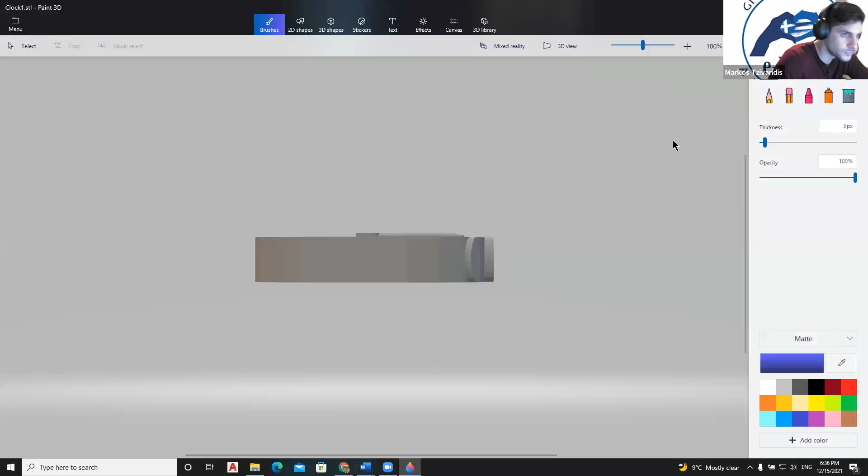All right. So let's go to the first clock. Let's see it all together.

I will not tell the names because we haven't asked anyone if they want to share their name, so we will just say it together. This is the first clock. As you can see, somebody tried to make, let's say, a clock for the hand.

Also, instead of putting a random square here, he also wrote something down. So he used a text, and you will see what the text can do. You can actually write things down, design what type of font you want, and if you make it a hole, you can make something like that.

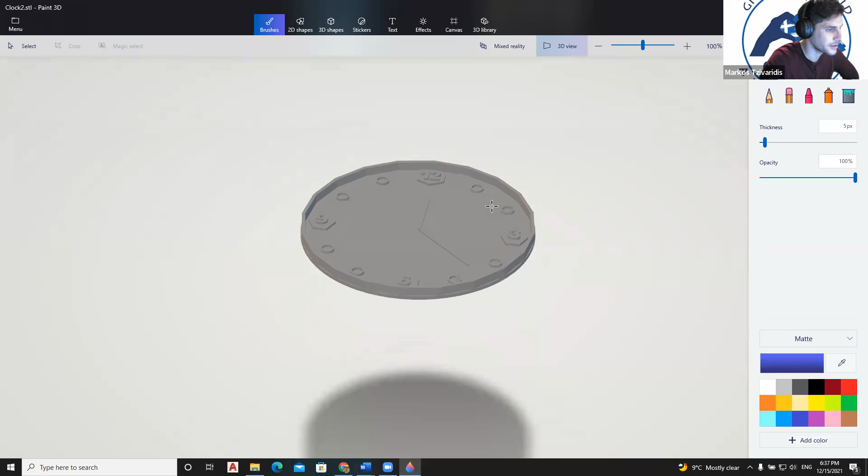This is clock number 2. I wanted to show it to you because basically this was the most beautiful one. I would actually 3D print it and put it on my wall. As you can see, it's very close to what I did.

The circles here, the 4 numbers, they are actually placed on top of an object, and yeah, basically that's the best design, the design, let's say, I would choose to go with.

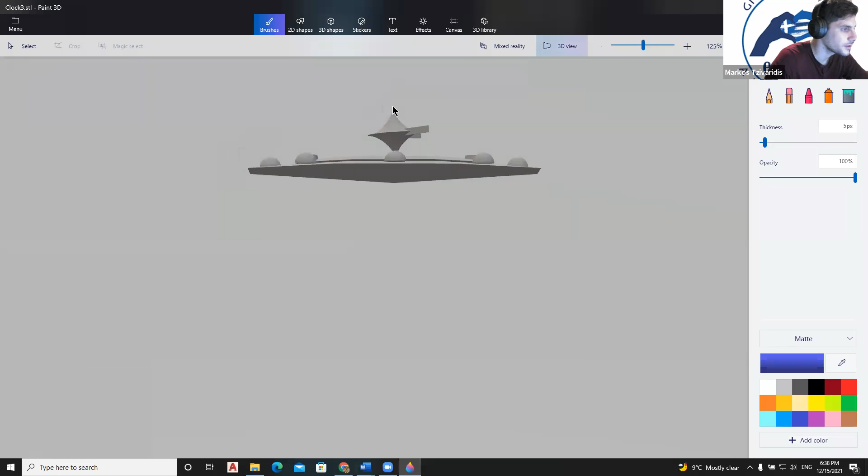And the last one is this one. So what I wanted to show here is that, as you see, the person who did it didn't make a circle. He actually made another type, let's say, of shape.

You can actually do that either by rotating, as you remember, with the stairs. You can do this part here, let's say, or this part, a triangle, and then just go on and rotate it, rotate it, rotate it, and duplicate it.

By duplicating, you can make this very interesting design, or you can actually use another shape.

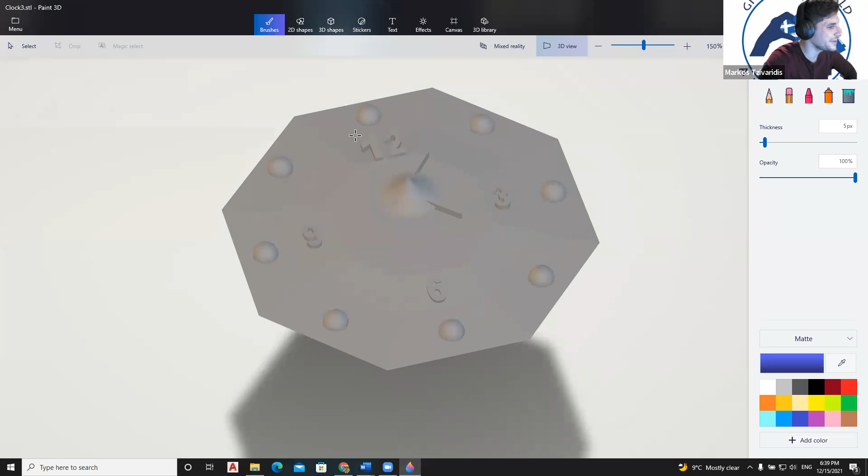Now, I think that this type of shape, the big one, may actually be a shape on Tinkercad, so maybe the person who designed it just took it from Tinkercad and placed it there. But either way, you can either do it like that or the way I told you to.

And yes, so basically, I don't want to take any more time to talk about the clocks. I want to congratulate everybody that spent their time making something like that. I saw a lot of things, some fun stuff, and some very interesting designs like those I showed you.

And now let's go to the main course. Let's all log in to our Tinkercad account and start creating a new design.

The first thing I'm going to show you today, as I told you before, is how to slice an object in two. And why would I want to do that? First of all, let me place the object first so you can understand what I'm going to talk about.

Come on. That's weird.

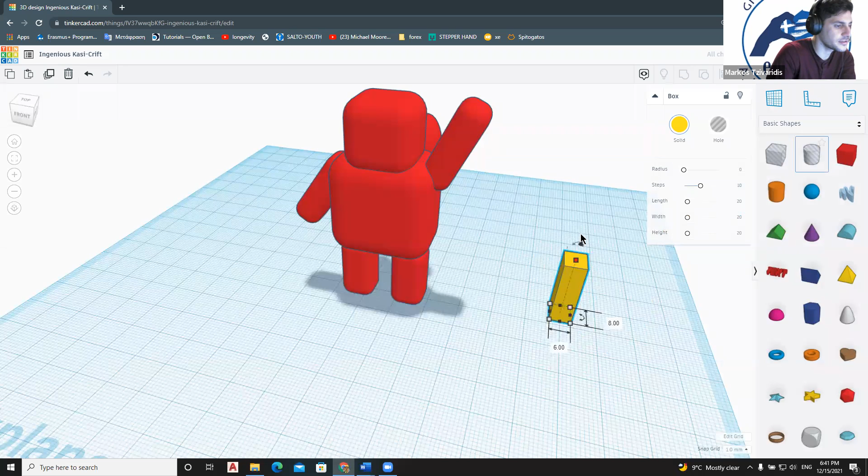This is the Astrobot, the Astrobot 2, or that's how they call it. So in order to print the Astrobot, if you want to print it, the slicing program will tell you that you can't actually print, let's say, this hand here, because it needs a support like that. I need to design a support like that to print it, because if I start printing here, it may fall.

So let's say that I want to avoid that. What could I do? I can either place it somewhere like that, hold on a minute, somewhere like that, so it prints from the beginning from here. Or I can cut it - cut this part here, just a hand, print it, and then glue it back together.

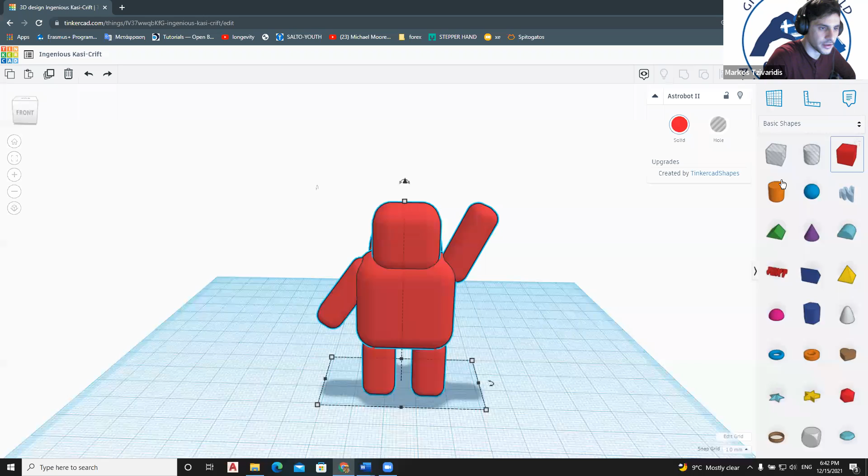So let's forget about this hand because it wasn't a very good example. Let's think about the legs, for example. So if I start printing the legs, I need a support here. I also need a support somewhere here. And of course, as I said before, a support somewhere here. Okay, like that. And let me keep that here for reference.

So in order to make the print faster, because supports also need time to be printed, I can actually cut the Astrobot in half. How do I do it? I drag a box and place it on the feet, let's say, of the Astrobot, like that.

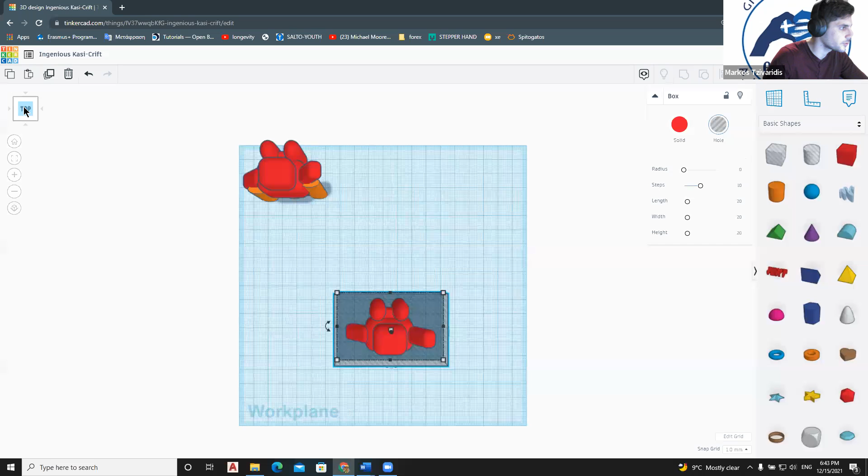I want my box to fit the whole Astrobot. As you can see, I click on the top here, on the upper left, and I fit the whole astrobot like that. You can actually click on the orthographic view to be sure that the astrobot is inside.

What I want to say here is that I always prefer the orthographic view from the perspective view because it helps me understand exactly where the objects are. But you can also choose perspective view, it doesn't really matter.

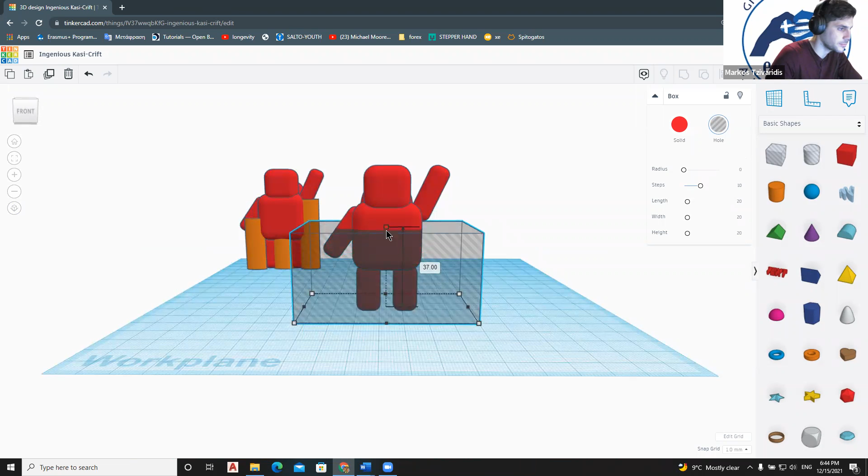So what I want to do here is cut it in half, and I am the one who decides how to cut it in half. What I want to do is cut it somewhere here, and now what I will do is duplicate the whole box.

So click duplicate while you have the whole box. See, this is here right now, but you also have to check the height, which is 37 millimeters. So right now what I want to do is just move my box up, 37 millimeters, like that.

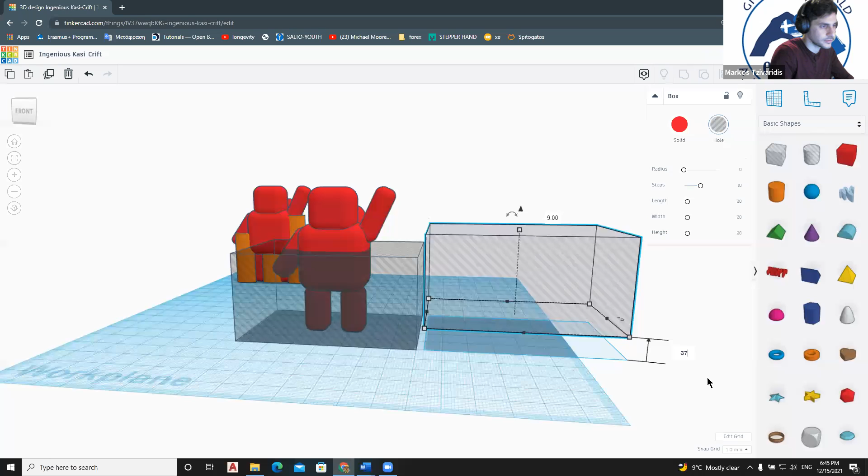And again, I will place my box back to my astrobot, like that. So now, if I duplicate the astrobot - instead of clicking, then shift clicking, then shift clicking, you can actually just drag your mouse and duplicate all of them together. And now you have two astrobots.

And maybe you have imagined how I'm going to do this. I'm going to delete one box from the first astrobot and one box from the second astrobot. And if I group the first astrobot with the first box and the second astrobot with the second box, I have my astrobot cut in half.

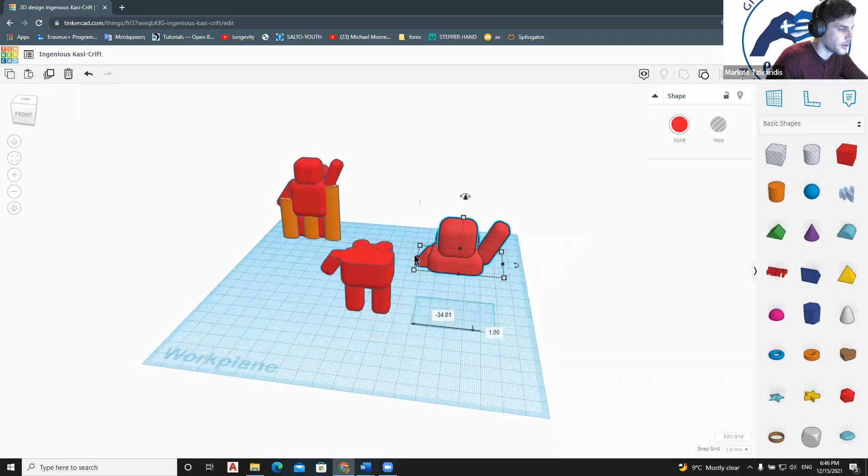And now, if I want to print it, I can rotate it. As you can see now, let me show you - right now, this part can be printed without any support, and the only support that I need is this one right here. So instead of printing that much of a support, now I can print my part with a small support, or maybe no support, and glue it together.

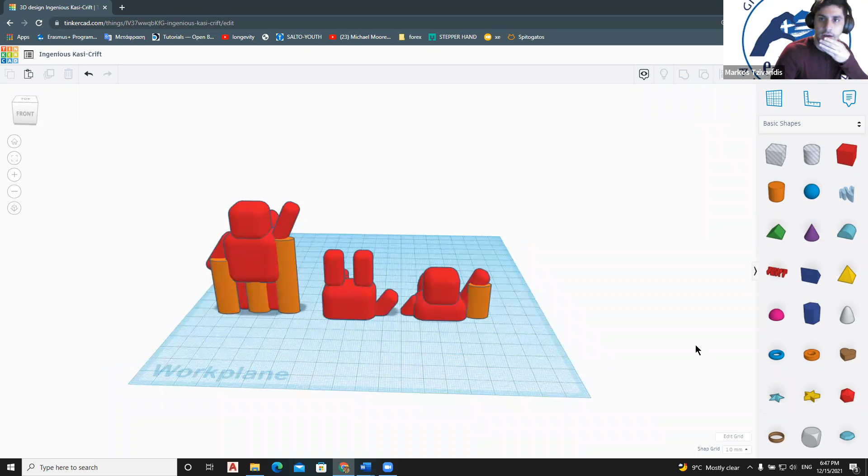So this was the first thing that I wanted to show you. If you have any questions, guys, you can ask now because we're going to move on to our second part. Maybe also write it in the chat, whatever you want.

Markos? Yes. Okay, I think it would be good to explain to all participants about the support because, you know, many of them are not very familiar with the 3D printing process. So maybe they have some questions about what support is for 3D printing.

Okay, I will explain it to you again, guys. As I remember, Thanos, Julie mentioned the supports. No, Julie, didn't you mention the supports? I'm not sure, I try to think about it, okay, but I'm not sure. Okay, I'll speak a little bit about it right now.

So basically, what happens? Let me, okay, let me go back to the presentation. 1 minute, guys.

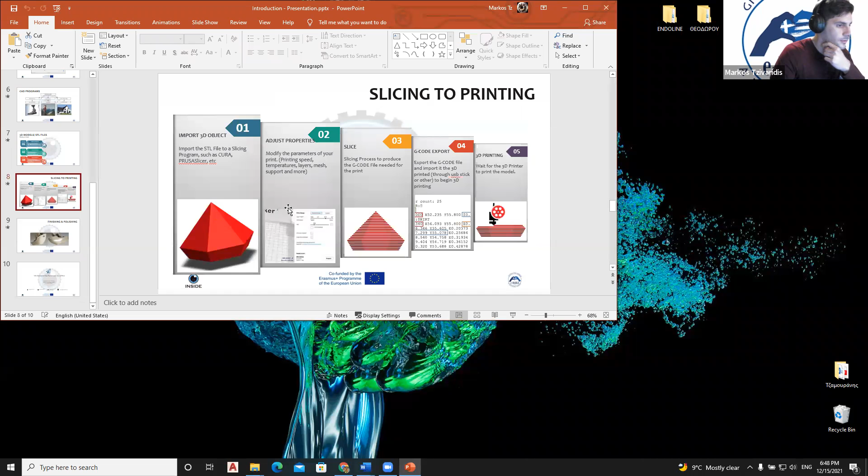Let me see what I have. Okay, maybe this. Forget it, let me just show you some pictures.

This is a very informative picture. So when my printer prints, it starts printing from the first layer, then the second one, and we are talking about FDM printers, not the other type. FDM are the cheapest and the easiest to find and use. So I print layer by layer by layer. When I reach this limit, after this point, I can still print, but it's not that safe now because I start printing on air.

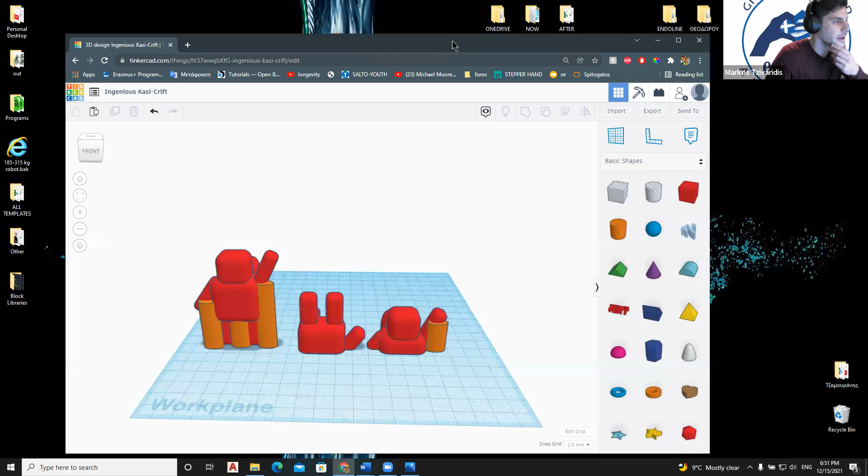Yes, and that's all, I hope I covered that matter. I thought Julie talked about it. I'm really sorry. Okay. Markos, don't worry, there's no problem. I really don't remember, I'm sorry.

In any case, if anybody has any question, okay, so Pia just asked. Hold on a minute, so Julie just answered, okay, let's move on.

So the next thing I will go through is how to import and export your files and send them to people, just to inform you how you will do that. We will go fast through that.

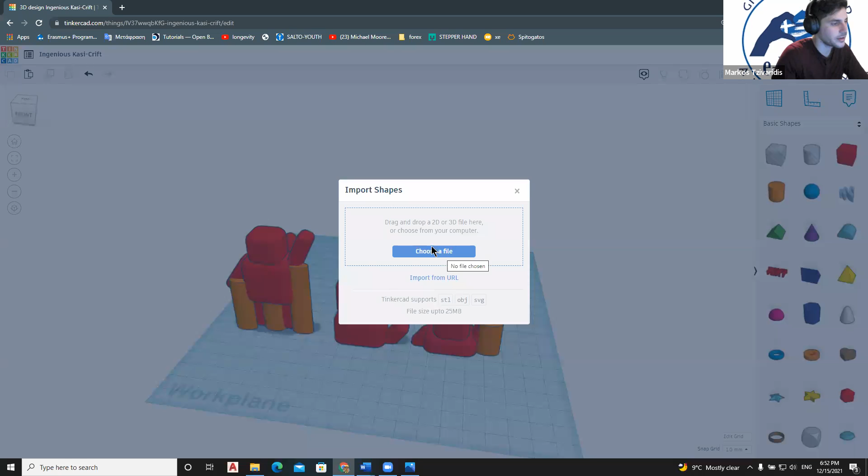First we will talk about importing files. So when I have a file and I want to import it, there are some ways to do it. I can either import it as an STL or an OBJ file, which is basically a 3D model file, like the one you see in front of you right now. You can export that file from any type of design program, well not any type, but most of them.

This is basically very self-explanatory. What I want to do now, and I want you all to do, because if you design to print things, that's what you'll do 50% of your time, is go to Google, write down Thingiverse, which is the most common site for finding designs to print, not the only one. Since it's Christmas, let's go to the reindeer.

And now you can go here, download all files, click on this, wait for 5 seconds. Okay, that's weird.

Let me... Markos, yes, that is not weird, this really happens to Thingiverse the last days. Maybe try not to download them all, go to the download... okay, things, and you will find it just a little bit further. Yes, okay, thank you, Julie, thank you very much. Maybe I'll download through here. Okay, yes.

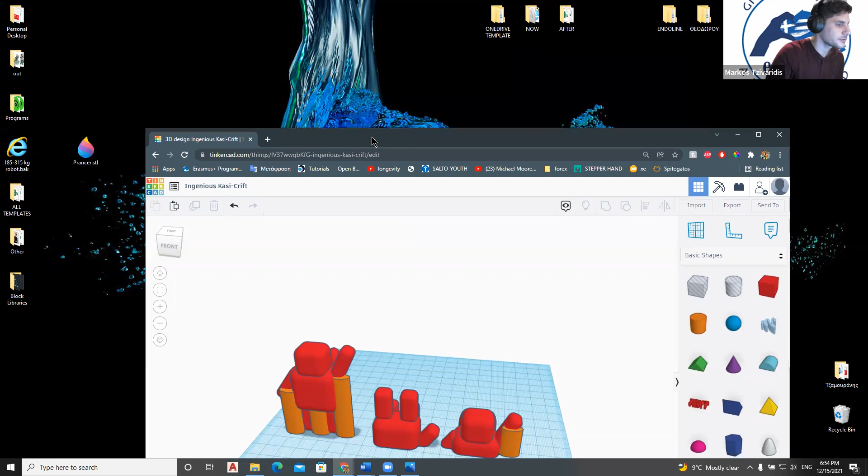So I have this one here, I hope this is the design. So this is an STL file, my prancer.stl. I can click import, choose a file, the one that I chose on Thingiverse.

Let me also show you that you can go to the search part and search whatever you want. Let's say I want to find an elephant. Thingiverse will try to find some elephant files, like this one here, or like there you go, or like this one, the pink one. So whatever you want to design...

Maybe I want to design a box, I don't know, I want to print a box or design it. You can find so many things here, and also besides Thingiverse there are more 3D printing sites where you can find free 3D models and either redesign them or print them.

Like MyMiniFactory, for example, .com. In any case, let me go back.

So as I told you guys, you click import, choose a file, and find your STL file, and just click open.

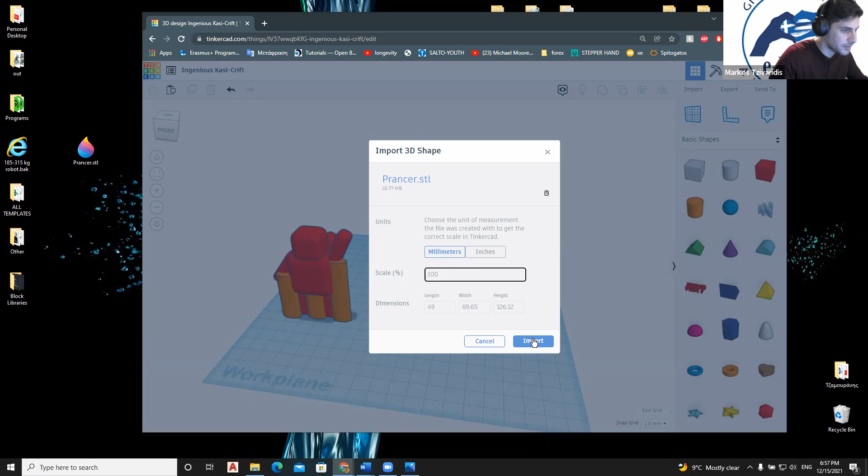Let's group all those together and put them on the back.

Markos, if I may. Yes, yes, yes. Vangelis Terianakis has a problem seeing where to download the files from Thingiverse. Could you show him again? Thank you. Of course, of course.

Since we are also waiting for the file to import, here you can click on any picture. Let's say I want to find an apple. I write apple, and now it finds Apple products. In any case, let's say I want this Apple iPhone stand.

So I click on the picture, and it redirects me to the site, and I can click right here. Click download all files, and it will download every file that James Declercq designed.

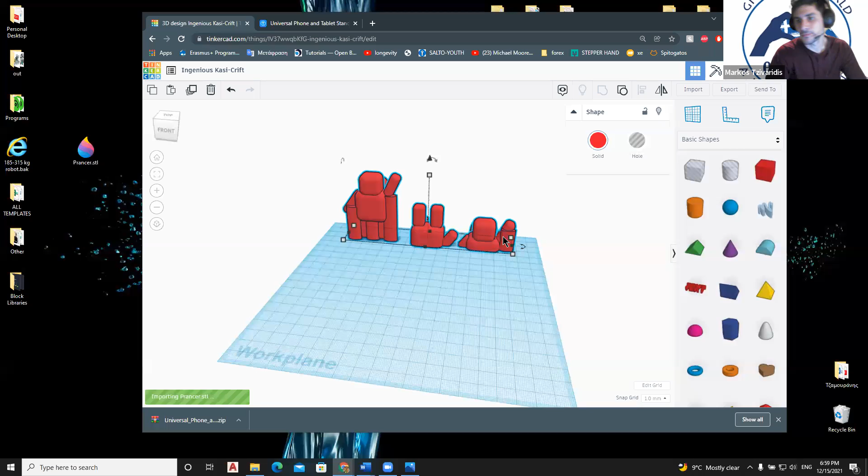So, yes, I'm trying to download it, but you did something else before. You pressed download all files, and the 404 error came up, and then you did something else. What did you do? To download the file. Yes.

So let me show you. Here on the stand, you can click here that says Thing Files. I will click now, and now you can see each file separately and download them separately. So if this error comes up to you, maybe you can try downloading them separately.

So Vangelis, please try to do it. And if you have any problem, let's talk about it at the end of the lesson, maybe, so we can continue.

So, wow, still importing the file. That's weird. So any other, all clear now? Okay, perfect. Okay. That's weird.

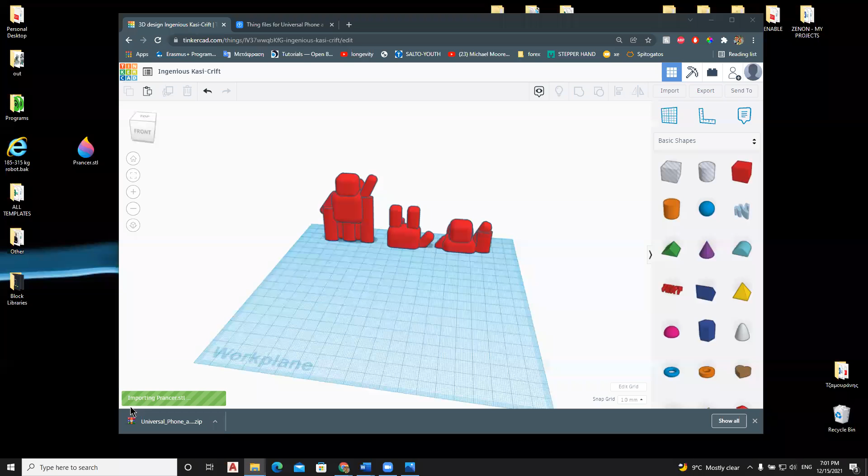Let's wait for a minute, guys, because let me actually talk about that. So if your object is not that simple, let's say it's not just a box, it's more complex, it has more shapes on it, generally more complexity on the design, it may take a lot of time to import it, because right now what Tinkercad is trying to do is trying to translate it, let's say, and import it to the program. And the more complex your file is, the more time it will take.

In any case, I will try to find a simpler file just to showcase. Let me actually import one of the clocks. So it's not gonna be that Christmassy. Ah, no, it will be. Okay, so the file just got imported. As you can see, it got imported with the support here. In order for you to not add support, just start printing.

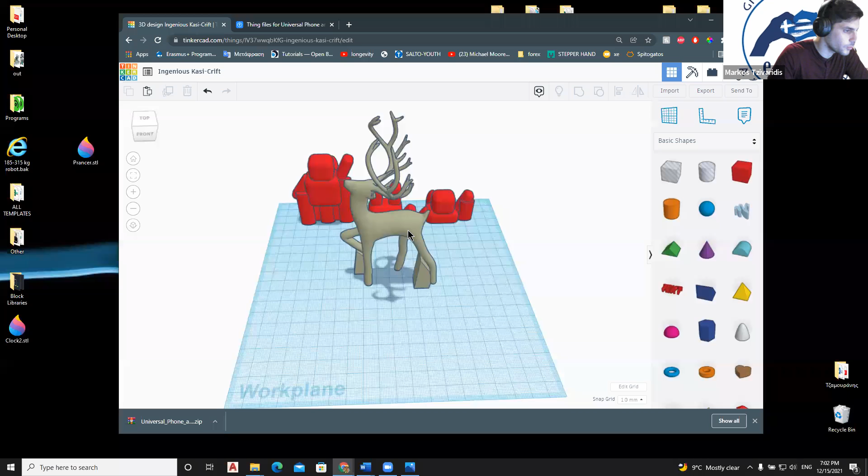And right now, what I can do is I can move it around. So the same things that I can do with a box, I can do with my reindeer here. Let me make it bigger. Okay.

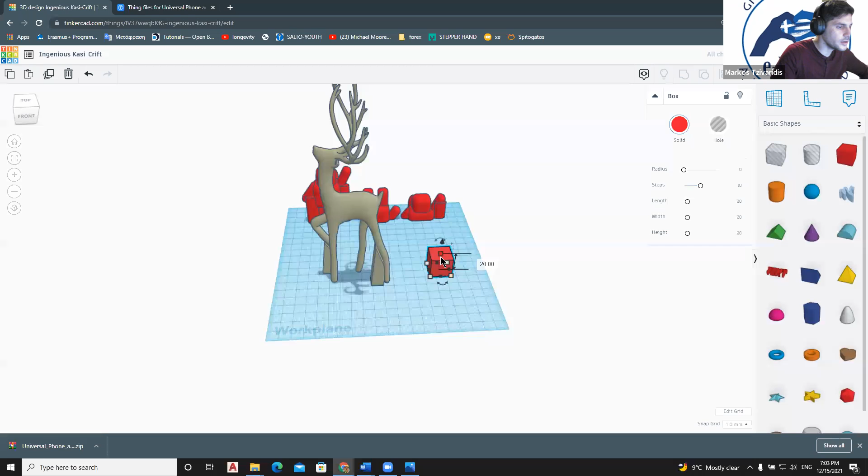I can also reshape it. So I can either make it slim, because maybe I want to put the reindeer on the wall, or I want to make the reindeer higher. So you can manipulate it the same way you can manipulate a box.

You can group it together with a box the same way you can do with a box. And generally you can use it as a shape. See, this is one thing right now, but you can use it as a shape and do whatever you want with the file that you import.

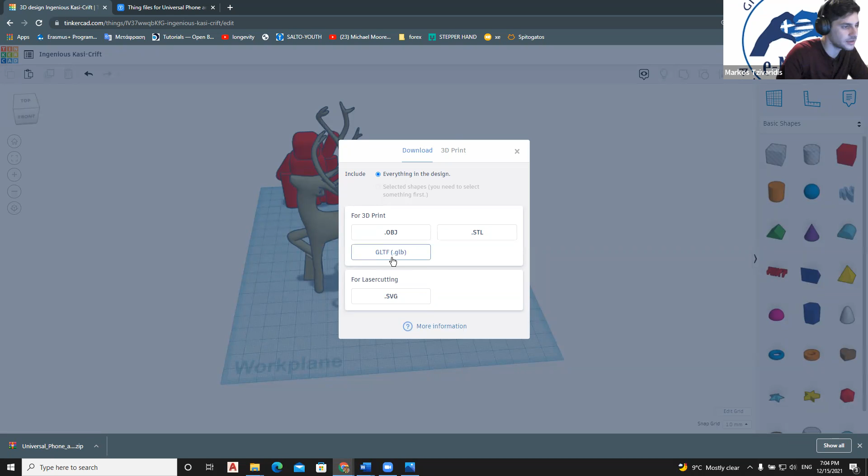So this is how you import and manipulate a 3D file when you want to play with it. The way to export it is just click on export. Since I haven't clicked on anything, it shows include everything in the design, so I can decide which type of file I want to export. I can export OBJ, STL, or GLTF, which are 3D files, or SVG, which is a 2D file for laser cutting or other purposes.

So let me click here. And what happens now on the bottom left, it says preparing model for export. Hopefully it will start downloading it here.

So let's say that I don't want to download all of them. Okay, so here it is, guys, it's already downloaded. Ingenious Kasi-Crift - see, this is the same name that my model has right here.

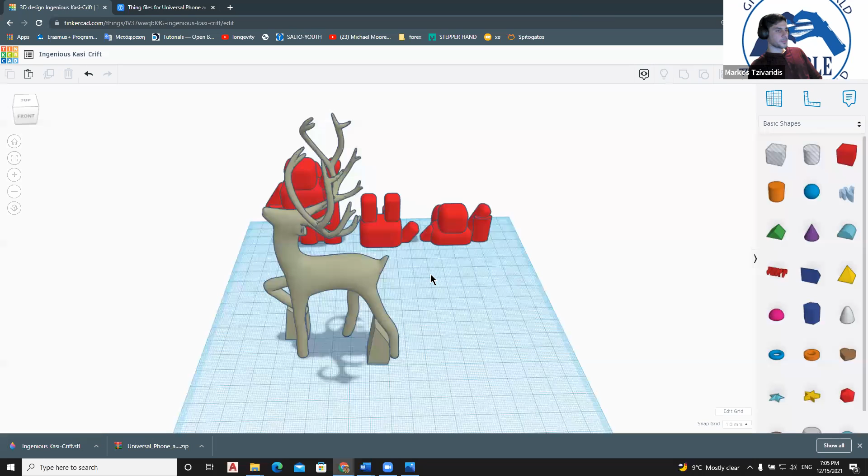Again, you can either download it as an OBJ or an STL, and again it prepares for export, and you can export. Now I will export the reindeer, just the reindeer, nothing else.

And the last thing that you can do is send files. What I want to show you guys is either you can click here and send them to Fusion 360, because it's a browser based program. You can send it to your account, but this is a little bit more advanced. You can actually send it to Thingiverse or My Mini Factory.

So you design something and you can share it with the community, or you can invite people. So if I click here and click generate a new link, now it generates me a link. I can click copy link, link copied. So I have a link now.

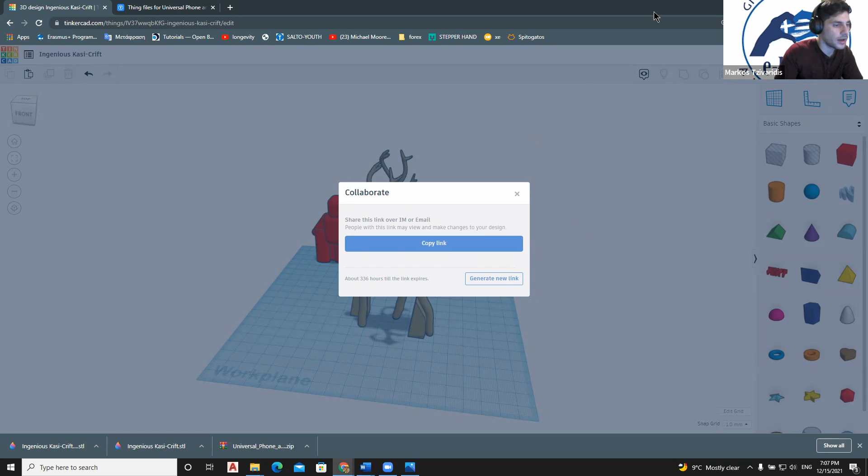So if I paste the link here, I can click and go on my design. This is my design right here. So I can actually share the link. I can copy and paste this link through an email or through anything else.

If I want, let's say, to share it with a friend, he can click on the link and dive into Tinkercad and maybe redesign what I designed, or change the color, or add something. So we can actually work together on a design and share it and talk about it and collaborate. So these are the three things that you can do: import, export, and send to.

What I want to do is talk a little bit more about importing files, because yes, you can import a 3D file, but you can also import a 2D file - you can import an SVG file. SVG files are basically 2D files that I can find on the internet and download.

For example, I can click freesvg.org. For some reason the internet is not helping us today. Okay, and there are so many pixels. So the same way I can search here on my toolbar on Thingiverse, I can also search on freesvg.org.

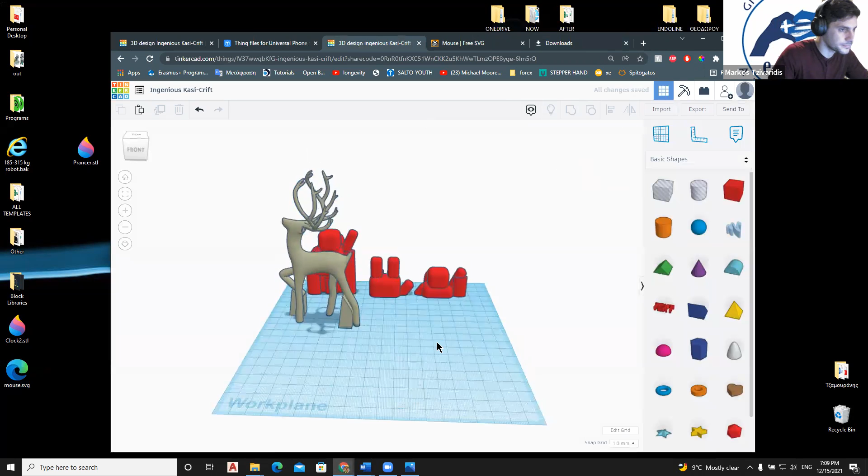I will call it mouse.svg. The same way I imported my reindeer, I will click here, choose a file, but instead of choosing the reindeer, now I will click on mouse.svg. There it comes up - again a UI comes up, and I can either click on center of the art or artboard, that is not that important. Scale, again the same thing. This time the 100% scale is a little bit big because it's 300 by 300, so I will rescale it to 50% and import it.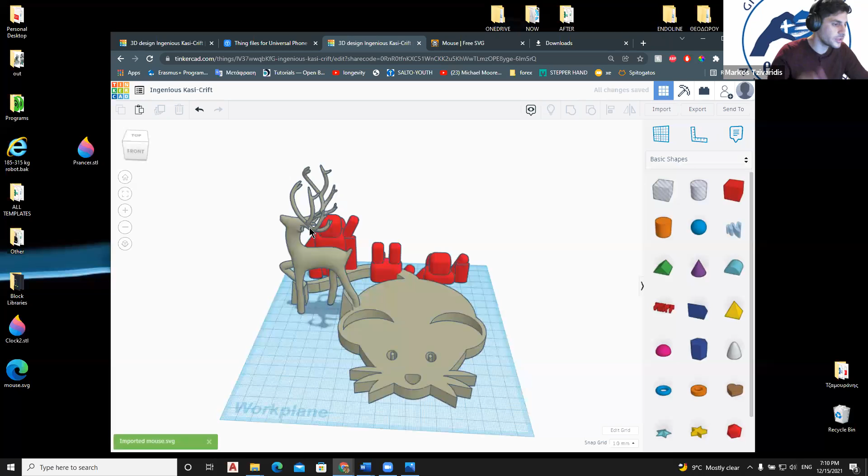So your question is, since I have a 2D file, what will happen? Basically, it's still a 2D image, but in 3D. And this is the final product. This is your 2D image in 3D. So I can find an image like that and make it a 3D object and print it, guys.

And you may ask, why would I do that? This is where I come and we start talking about helping visually impaired people with this tactic, because let's say that you want to teach someone how the world looks like. So I will make a new design for this.

So maybe you can find an SVG file that has the world and print it and let them touch it. But you can also import it as a URL. So what I want to do here...

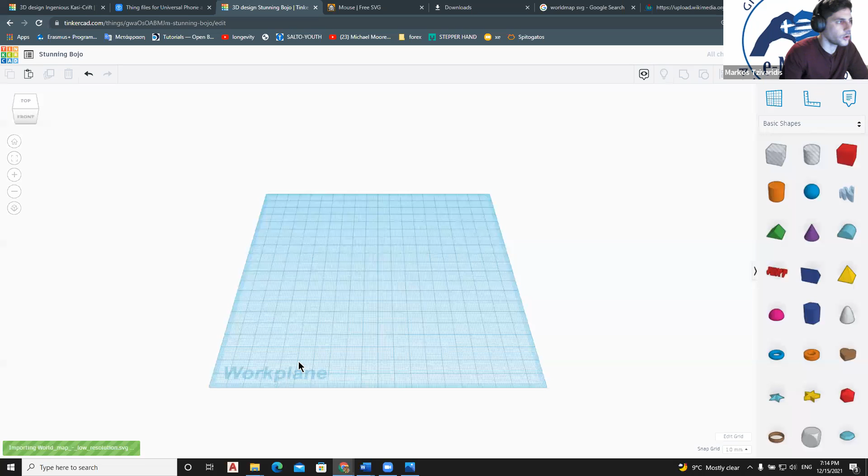So how much time did that take me? It took me 1 minute. It took me 1 minute to go to the web, write down worldmap.svg, find it, and there it is. There I have the whole 3D world map in my hands.

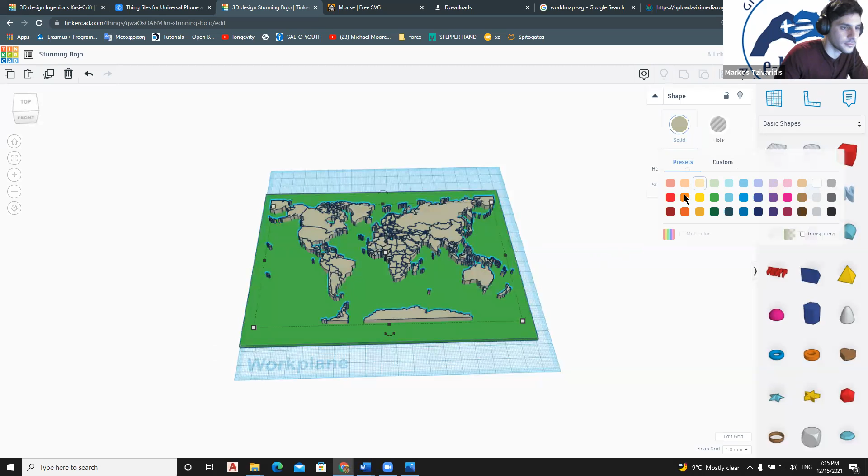And what I want to do now is find a box, make it like that, make a height, let's say, of 2 millimeters, put it somewhere like here, maybe change the color because I don't like red. And like that, I can actually take this and print it.

And why not? This is the first thing that you can do without any trial really of designing things. Now you can actually print that and show somebody who has a visual problem, let them touch it with their hands and understand how the world looks like, how the continents look like, how the countries are separated by each other.

Let them have an understanding of how the world is shaped and how a map looks like. So this is the first 3D model, guys, which took us 2 minutes to model it, because basically we didn't model it, we just imported it. And now what I will do is start actually designing from zero. Before doing that, I will stop for 1 or 2 minutes, wait for some questions, and then go on.

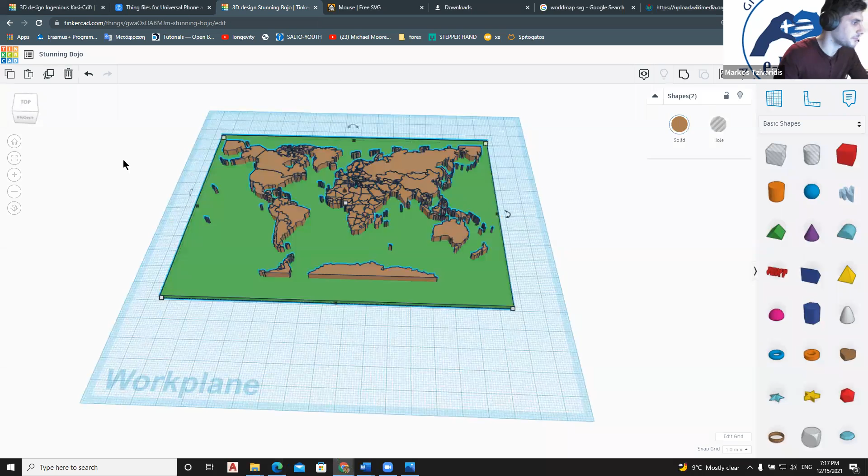So let's start designing. The first thing we're going to design today is a 3D plot diagram, which will help a visually impaired student understand how a plot diagram works. We will put the x-axis and y-axis, number the axis, and try to put pins on top of the diagram, so somebody who can touch it with their hands can understand how a diagram works.

So for those of you who are following me at this process, I will try not to go too fast.

For the outer diagram lines, the first thing we have to do is drag a box and change its dimensions. So I'll change the dimensions. Where did it go? Ah, okay, this is not the dimensions. These are the dimensions: 120 by 5 by 6.

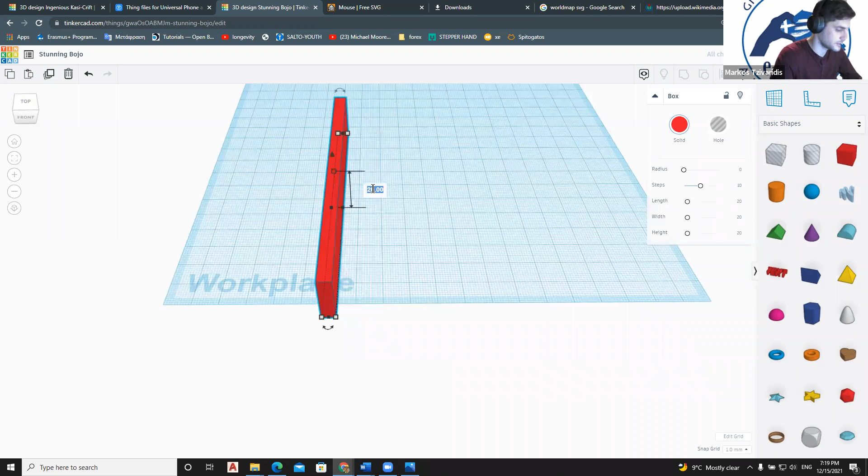Markos, could you repeat what you are going to show us now? Yes, we are going to design the 3D diagram project. So let me show you the end result, so people will understand what I'm talking about. Yes, thank you.

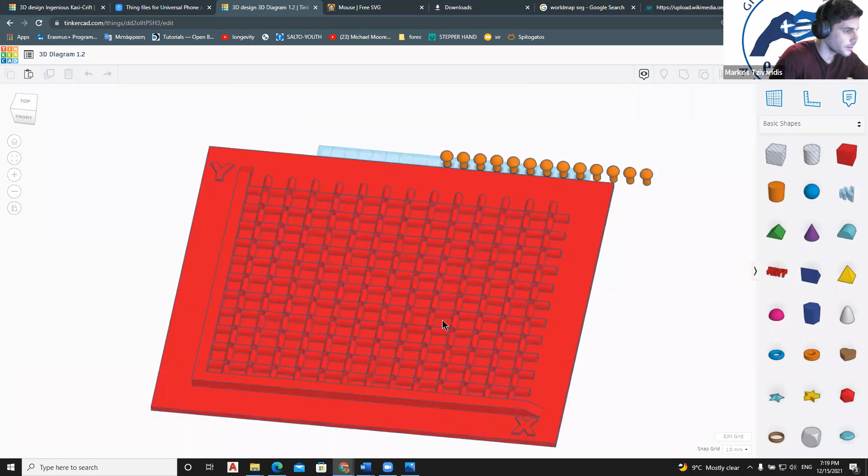So this is the end result we'll end up with. I'll make it green since I don't like red. As you can see, this is an X and Y axis plot diagram that you can number with 1, 2, 3, 4, 5. And here are the pins that you will print, and maybe take a pin. As you can see, there are holes on the diagram—all these holes are what we're going to design.

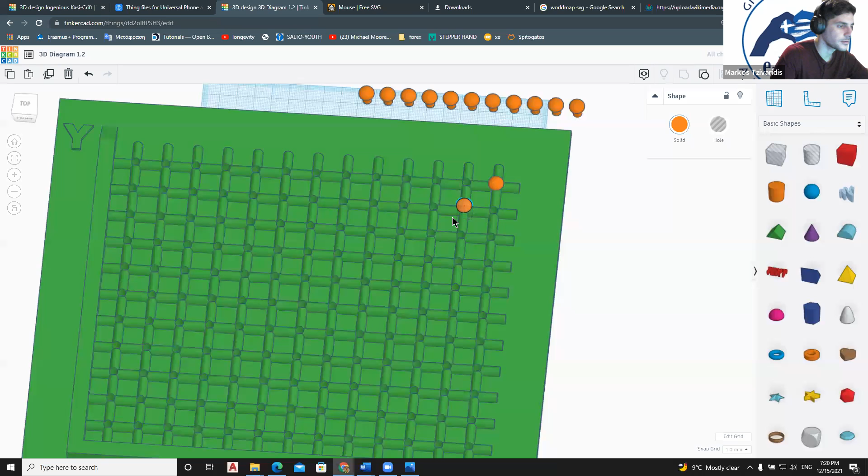When you print the pin, you can actually take it and put it on top like that, like that, like that. Let's say this is the X equals Y diagram. For a kid, this is a very good way to let them play and understand how a plot diagram works.

So this is basically y equals 2 plus x, right? No, x equals 2 plus y. Anyway, so I hope I covered what we're going to design. Yes, thank you.

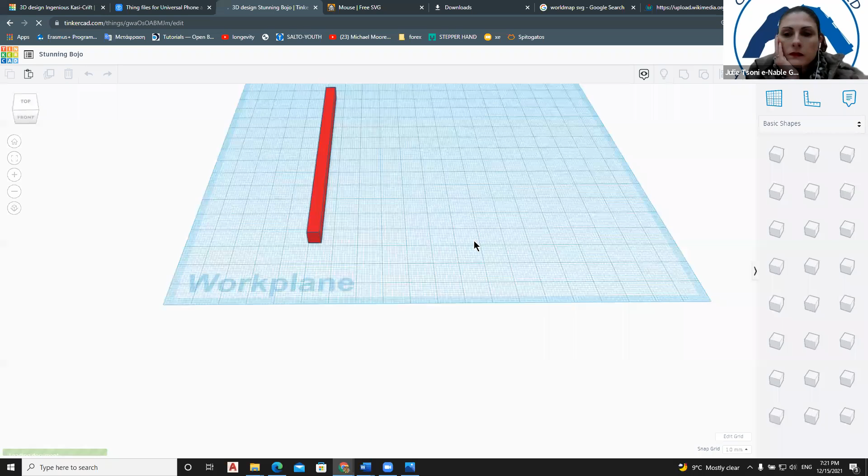Let's go back here. Okay, so this is the first axis, the y-axis. What I want to do now is duplicate that and rotate it by 90 degrees.

If I shift and click rotate, I can rotate it easily to 90 degrees. Let me show that—if I rotate it like that, it goes degree by degree, so it's a little bit hard. I can still do it, but it's easier if I click shift, which gives me fewer options, snapping it to 90 degrees.

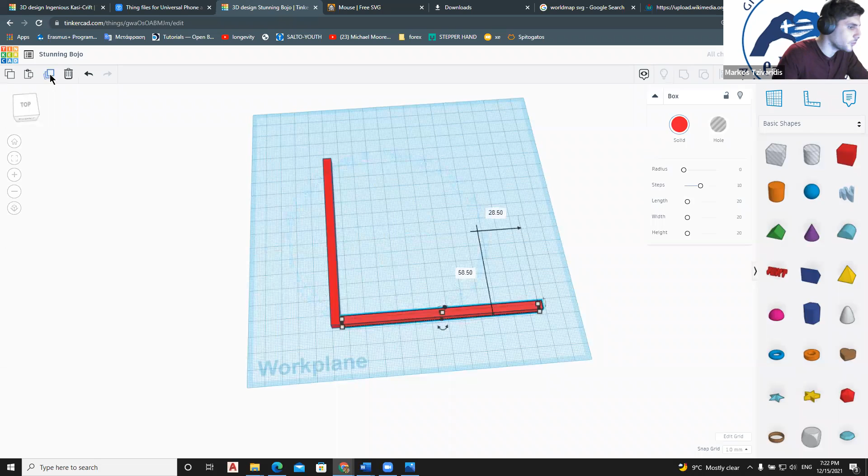So what I want to do now is align those two like that. Okay, it's not aligning. That's weird because I have 1 millimeter. Okay, let me click here.

Markos, we have a question in the chat room. She asks if she can change the rotating axis, since by default it is in the middle. Let me hold on a minute and read that. Yes, can I change the rotating axis?

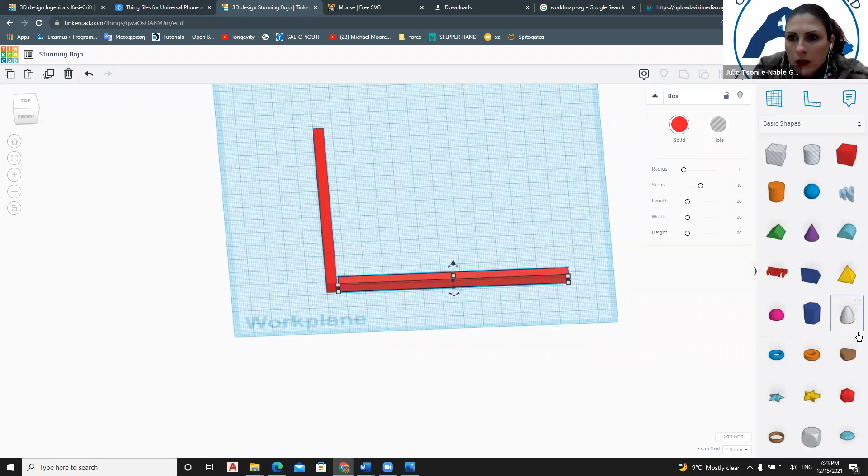I don't understand the question here. I think she's asking if she can rotate by the edge, so she can shift it on a different axis. I think it's possible for things in Tinkercad—you have the option to rotate in all 3 axes, like that. Yes, I think that's the question. Or maybe she's asking because by default it is in the middle. Maybe the question is whether you want to rotate it from this point here, from the end point. This is the question.

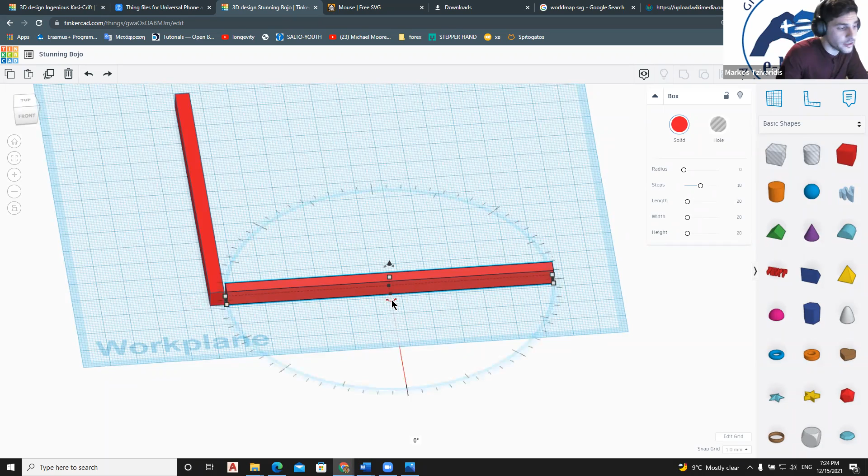So the answer is no. Tinkercad is a newbie designing program. For all I know, there is no option to rotate from another point. Generally, in more advanced design programs, yes, you can find a point and rotate an object depending on that point and orientation. But since we're on a newbie program and starting to design, this is not an option here. So you will need to rotate it and then still try to place it appropriately. So let me continue.

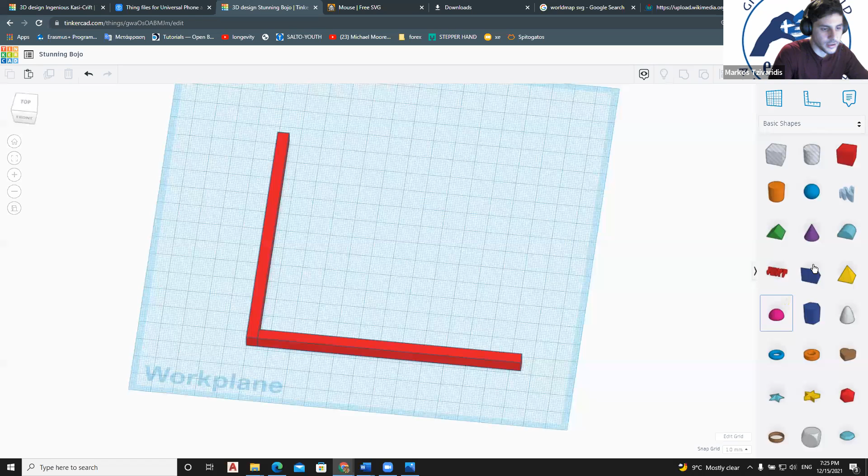So we have the outer lines, the X and Y axis. What I want to do is also put a wedge in order to make it more beautiful, and redimension it to 10 by 5 by 6, like that.

Now I will do the dummy placing. As you can see, I can click on top and place it like Lego. There's no need to try to align things right now, we want to do fast operations. So I'll just drag it and put it here. Now I have two beautiful X and Y axes.

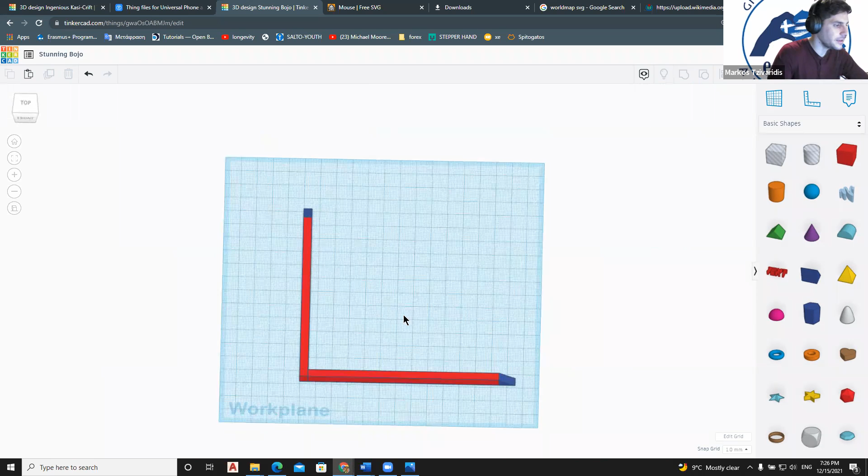Now I want to design my inner lines, the lines that refer to the numbers. So I drag out a cylinder and rotate it by 90 degrees, like that. Again, reshape it to 120 by 3 by 5, with the height at 5.

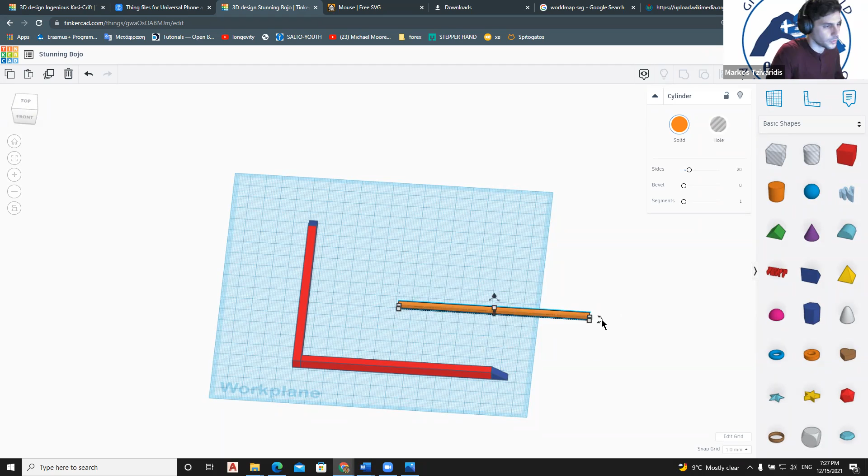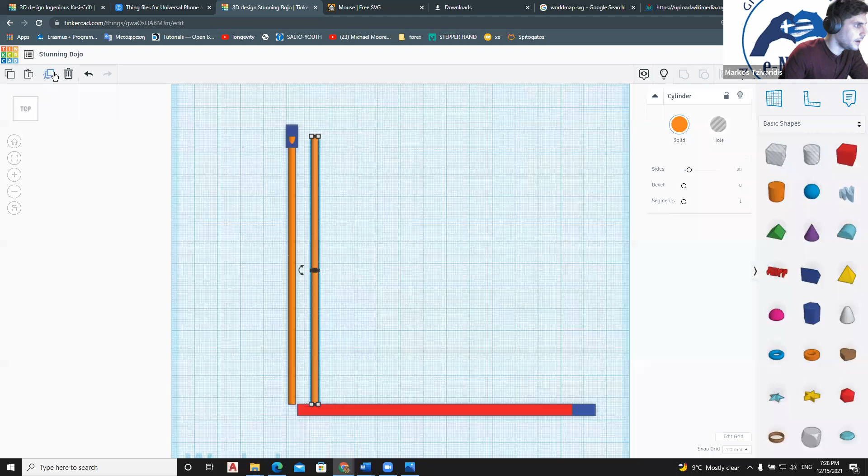Now I want to place it appropriately here, like that. Now I can duplicate. Since I placed it here, I want to hide my red outer line and start duplicating this one. Shift click and duplicate it 10 millimeters away from the previous one. So now I don't click anywhere else on the workplace, I just start clicking duplicate. Maybe that's fine, this is fine.

So I have my inner lines, and now I want to do the horizontal ones. I just duplicate again, rotate by 90 degrees, like that. Place it, sorry, let me show it again. Click on top so you can view exactly where you want to put it, click here, place it appropriately, and hide my outer line.

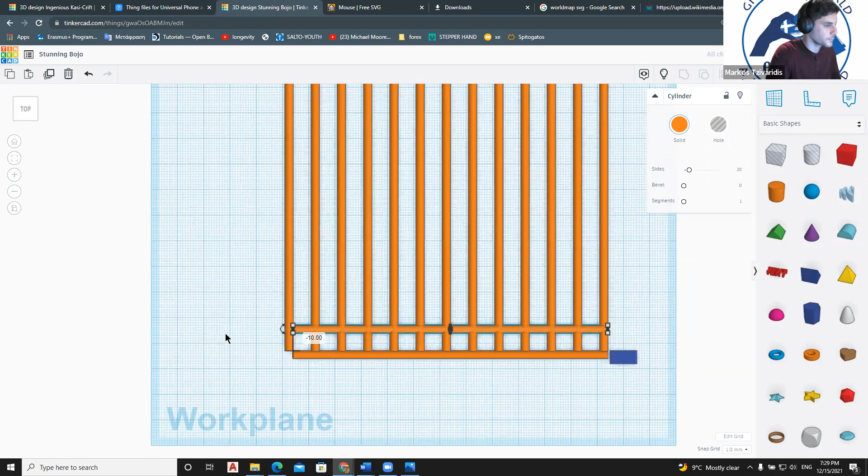And start duplicating, again 10 millimeters away, and click duplicate as many times as you want. I'll just delete the last one. And when I unhide them, now the diagram starts appearing, as you can see.

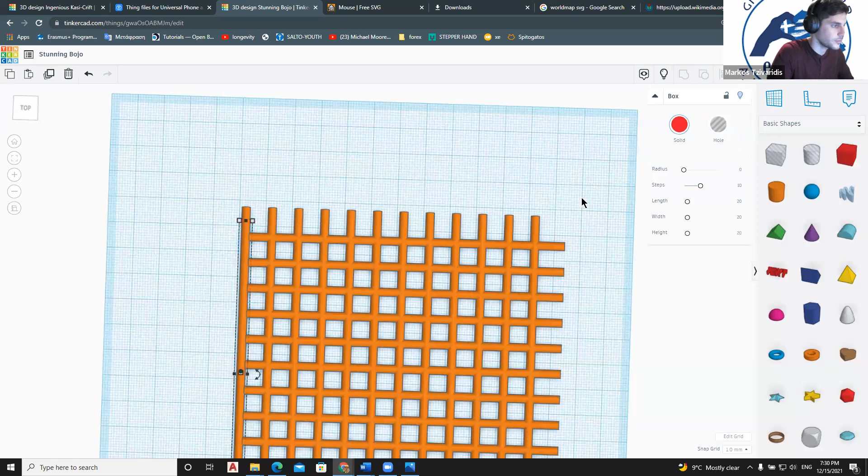Because I don't like this one here, the outside part from the red, what I want to do is hide the wedge, hide the red one maybe, and just lower the height here, like that. Okay, so now I don't view this anymore.

Let's make the base. The base, guys, is the same way I did with the map. I will just make a big base. Let's say the base is 170 by 150, by a height of 2, let's say.

Now I will place it appropriately here. There's something I don't like on that, let's make it 150 by 170. Okay, this looks much better. Place it appropriately, like that. Sorry.

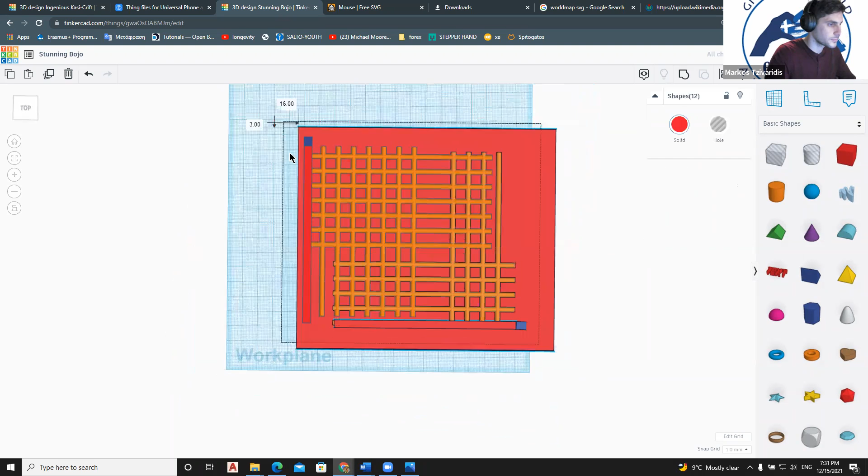Change the color because red is too much. And there it is, there it is. It's very close to the end design, as you may understand. But what I'm missing now is the holes, the pins, the X and Y axis, and also the numbering.

So let's start creating the holes. I will drag a hole cylinder like that, and change the dimensions of the cylinder to 3 by 3. The height doesn't really matter right now because I will create a hole which will go through all of my design. Again, I'll go on the top and place it appropriately on the top, like that.

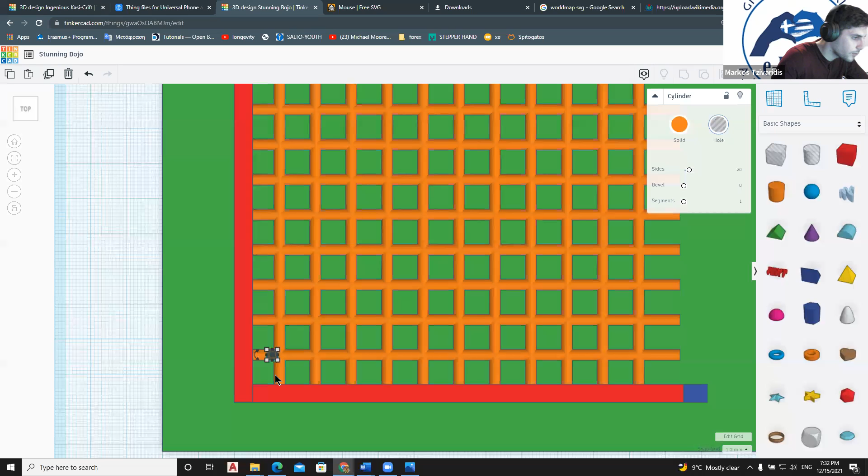What I want to do now, sorry, I am on top right now. I want to duplicate the hole cylinder, and the same way I did it with the lines, I do it with the holes and start duplicating like that. Done.

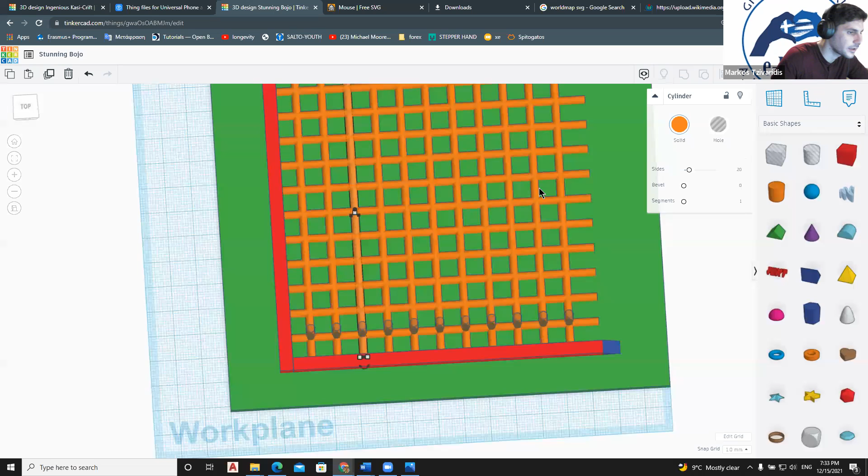Right now what I want to do is transfer the holes 10 millimeters up this way. You may find a problem here, guys, because when I try to click on each one, I may click on the lines here, or I may click on the box. So what you may want to do is hide all of that, just hide everything except the holes, and maybe the wedge too, why not.

Now duplicate the holes, click duplicate them 10 millimeters up, and again start duplicating like that. What I will do now is group them all together, so when I click on one of them, I also click on all of them because now they are one object.

Now I can unhide my diagram. Oh, what did I do? Wait a minute, sorry guys. I think I ungrouped instead of unhiding. And also the program stopped working.

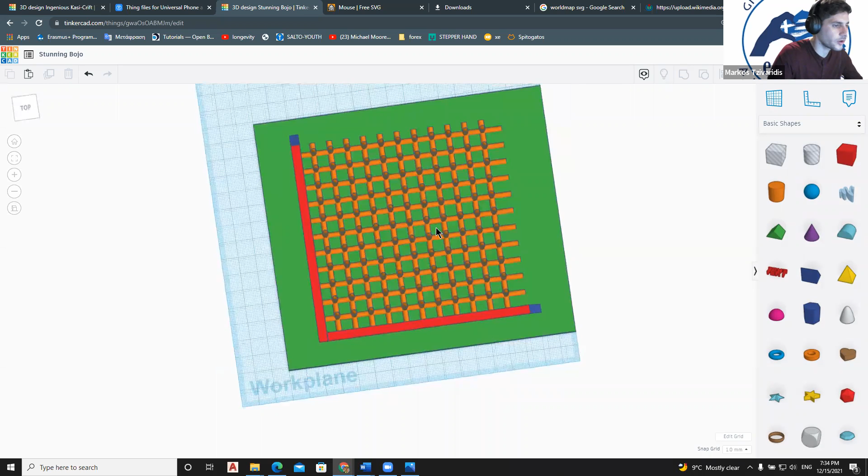Let me unhide everything. As you can see now, every hole is on top of every cross. So if I just group everything all together right now, by clicking Control and group, this is actually going to take a while. So if you have a question, write it down in the chat and maybe I'll have time to answer.

Let's all wait for the end design. Oh, that was much faster than I thought. What I want to do here, do you remember, guys? I can click on multicolor and still have one object, but see them in separate colors. It's much better for the eye.

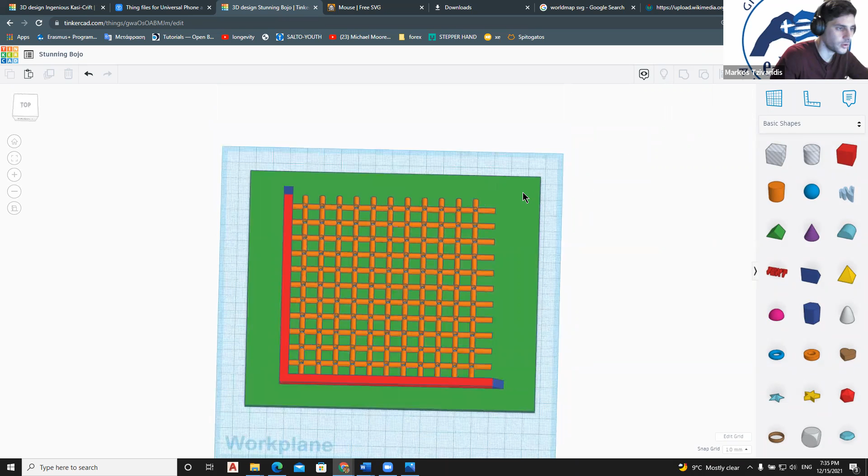Now since I have the holes, I also need to make pins to put in the holes. How do you do that? You just drop a cylinder, and instead of 3 by 3 like the hole was, you make it 2.8 by 2.8 so it fits the hole. Let's say we want a height of 5. Okay, let's do it 5, like that.

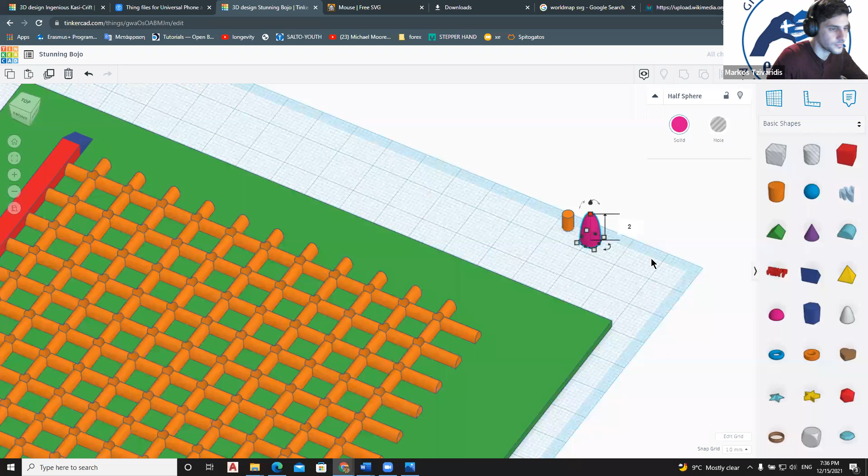Now I will drag a sphere that I want to put on top of the cylinder, and I want to make it 5 by 5 by 2 this time. All right, and now how do I put the sphere on top of the cylinder, guys? How do I do that?

We talked about the work plane tool. What I can do with the work plane tool is click here, find the top of the cylinder, and click on it. Now when I click on my sphere, my half sphere, and click D, it goes on the work plane. So I just drag it here like that, and now I'm on top of the cylinder just by clicking D. Or if you don't want to click D, you can move it manually with your hand, but clicking D puts it right on top of the work plane, as I showed you in the previous webinar.

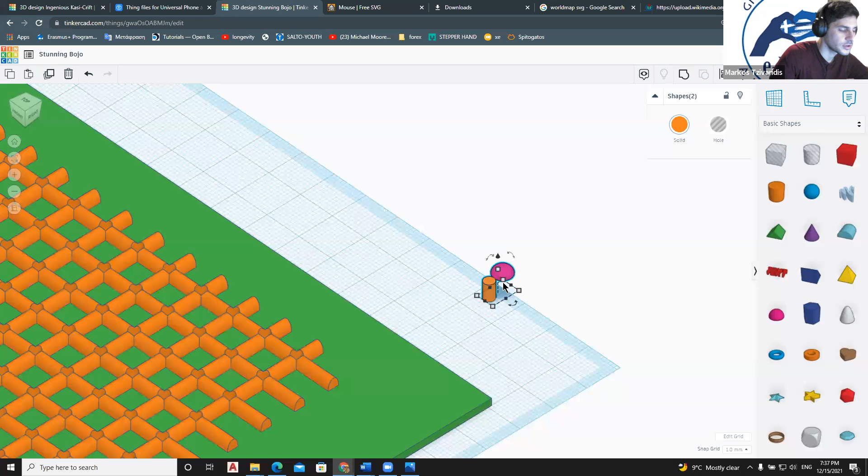So now what I want to do is align them together. I'll leave the work plane tool by clicking anywhere else, so I'm back on my work plane. I can align them with the align tool — click on both, then click the align tool. Of course I don't want to align them by height, because this is what would happen, and I don't want this to happen. What I want is to align them on the X and Y axis, like that. And there it is — there's my pin.

I have a pin now. I can group it. And I have a pin now, like that. You can duplicate it as many times as you want in order to print it, like that.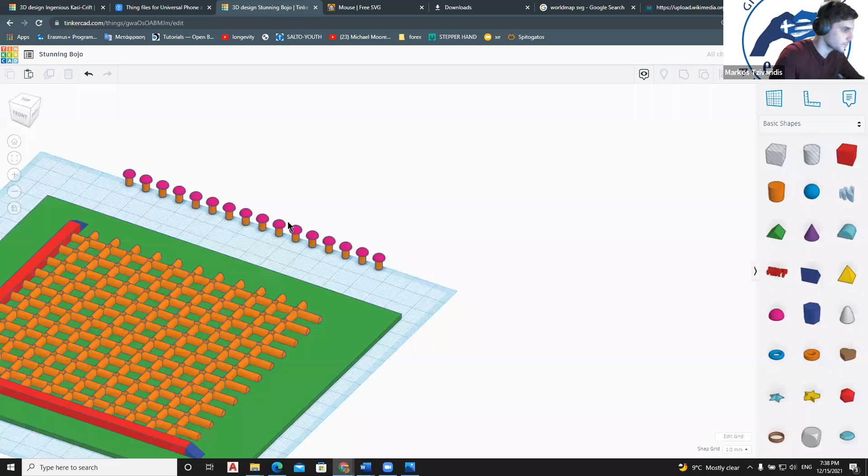All right, now this is basically your board, guys. You're done, you're already done. You have designed a 3D diagram.

Now what you can do is go on the design starters, and here you can find — I think we haven't talked about this library, so let me spend a minute to talk about it. This is a new library for Tinkercad, it wasn't always this way.

Let's say when you're starting a design, this is what comes up — the basic shapes. But here you can find a lot of things and drag them inside your prints. Maybe you can click here and find your creations. I haven't created a shape, but you can create one and drag it just like a box or cylinder. Maybe you have favorite designs here so you don't have to search for them again and again to drag them. From the basic shapes and below, there's a lot of things to find.

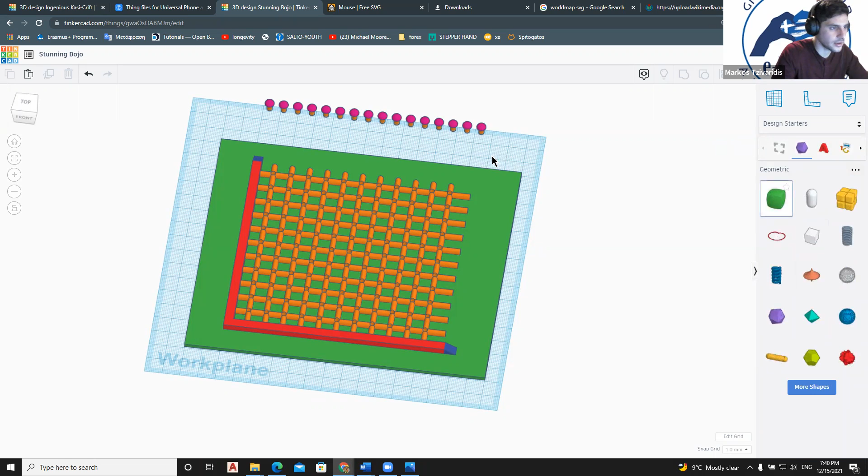The basic shapes are what we talked about, except the text, which we're going to talk about in a minute. In the design starters, you can find more things, like the geometric designs — like this one, like this one, like this one, which is very weird. That's a very weird design here.

We can find letters and numbers. Most of you did because you designed the clock. Or you can find creatures like the astrobot that we talked about, or a weird doll of Elvis Presley, vehicles and machines, and so on. So you can browse on that, find things, redesign them, maybe gain some ideas of what you can 3D print.

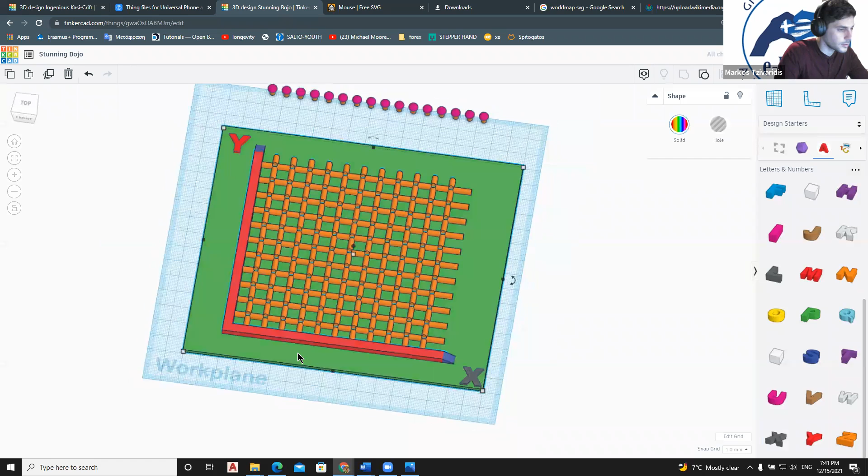Okay, let's go to the design starters for now and find our X and Y letters because we want to put them on the axis. This is the X, I will just drag it. And this is the Y. So I will put the Y here and the X here. Maybe make that bigger. No, that's fine. Okay, so this is it.

Now, if I want to number it, the best way to do it is by going to the basic shapes, drag the text like that, instead of just dragging the numbers 1, 2, 3, and so on. Here you can, on this board right here, change the text. As you can see, it writes text. You can change the font, the height, the segments, everything. What I want to do is write 1, space, space, 2, space, space, 3, space, space, 4, space, space, 5, space, space, 6, and so on, like that.

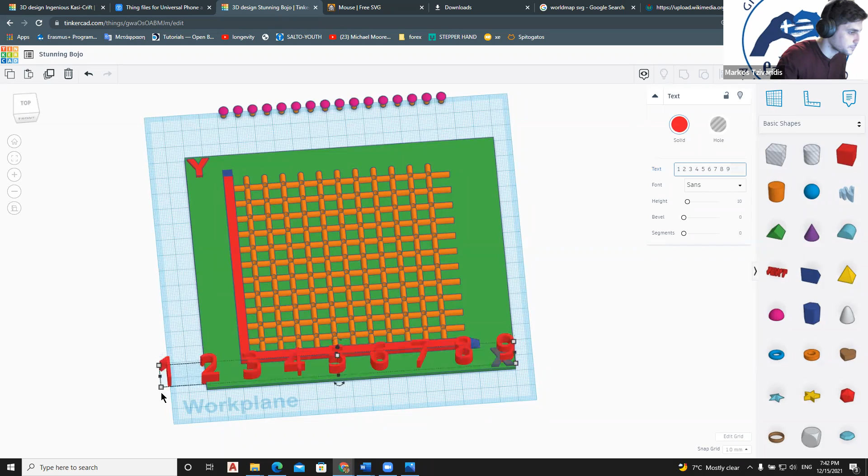Now I can reshape it. Okay, that's not good. Okay, now I can go on top again. Reshape it like that. Okay, that's a good one. See, and I have already numbered it. Again, you can manipulate it as if it was an object, like that.

So now you have a diagram, numbers that visually impaired students get to touch and understand how they correspond to its line. You have pins that you can put to create the diagram. You basically have everything you need for a visually impaired person to start understanding plotting diagrams, and also you can...

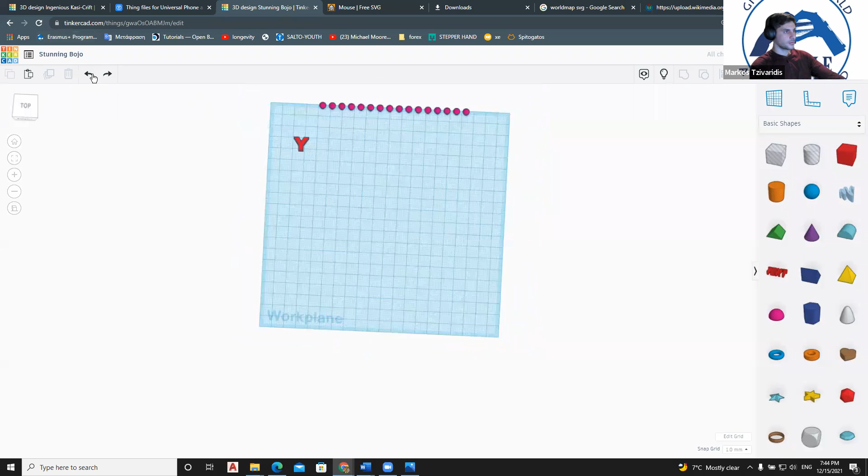Of course you can always make that even bigger. And let me hide that. Nope, sorry. Okay, like that. Maybe you can do the minus part, the minus Y or the minus X, make that bigger.

Now, the only problem that I can see here is that it's very small, because it's 15 centimeters by 17 centimeters. This is very small for a class to have. So maybe what I want to do is, instead of 150, I make it 300. But now what happens is that it's very big for my printer to print. So what do I do now?

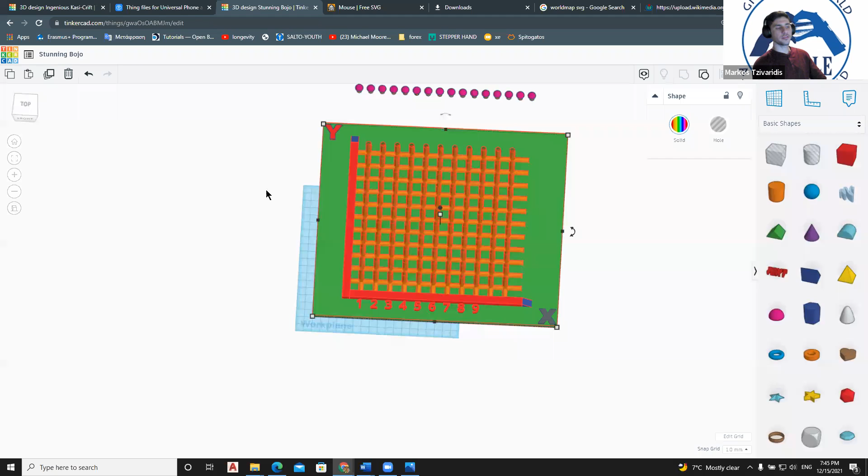Basically, the only thing that I can do is cut my design and then glue it, the same way we did with the Astrobot. So I will do it really fast this time. I will just make a box like that, duplicate. See, I have 171 millimeters length, so I will just go 171. Okay, now I will cut it in two.

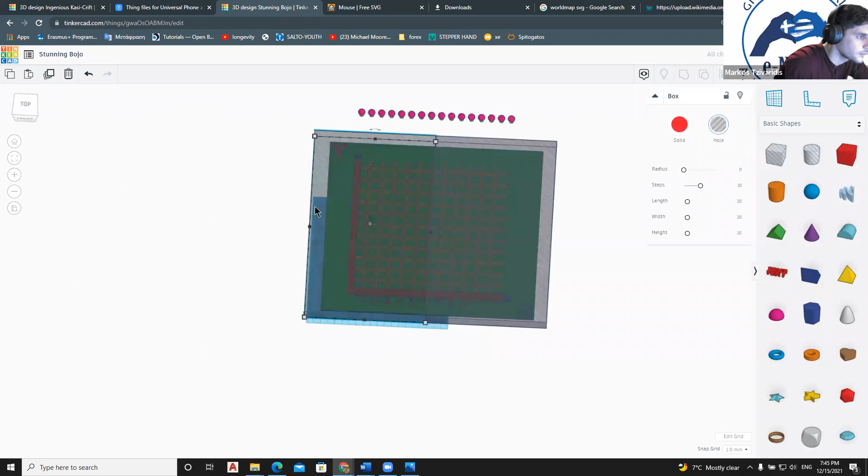Okay sorry, I will again try to take this, duplicate. Why does that happen? That's so annoying. Okay, that is duplicate. Okay, there's a problem here and I don't know what's happening. Duplicate. All right.

Since it's 7:45, I will not try to do that now. You saw it with Astrobot, there is no need to do that again. Basically, what I was going to do is cut it in 4 quarters. So let me just showcase: cut it in 4 quarters like that, and then...

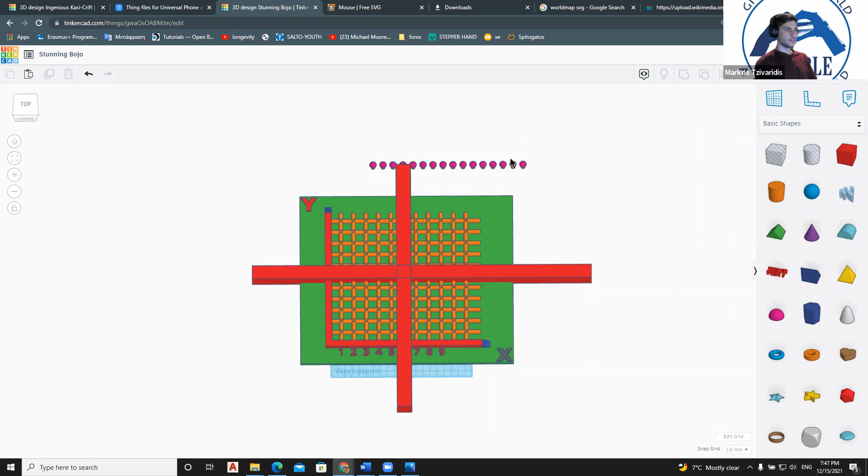You can download each one separately, have 4 STL files, the same way we did here. Let's say I want to click here, as you remember. Let's say that... what is happening? Okay, let's say that I want to export here. I just click select only the selected shape, click STL, and then download all 4 quarters. Okay guys, and print them one by one. So this is a 3D diagram.

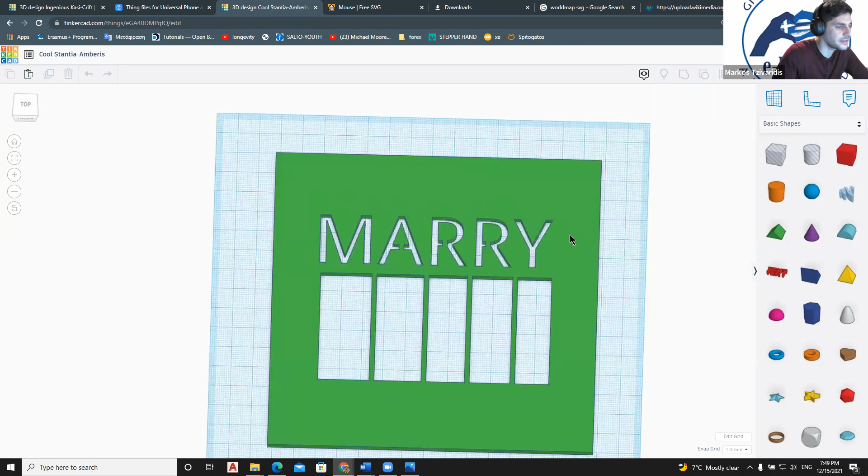Imagine a paper here on the work plane, and the holes here on the M, on the A, they guide the kid to write down their name, and then on the bottom they can start writing their name without the help of the guides. So how do I do that? Let me do it, I just drag a box.

Let's make a base the same way I did the previous bases. Let's say 150 by 150 by 3. Okay, so now I have my base, and I will drag the text and write down the name of the kid. Let's say that the kid is called Marry.

Like that. So, okay, this is a weird font. I would choose this one because this makes more sense and it's much easier. So you can reshape the name of the kid, and now I have my text.

I don't want it to be solid though. I want it to be a hole, so I make it a hole. I group them together, and now I have the name of the kid as a hole.

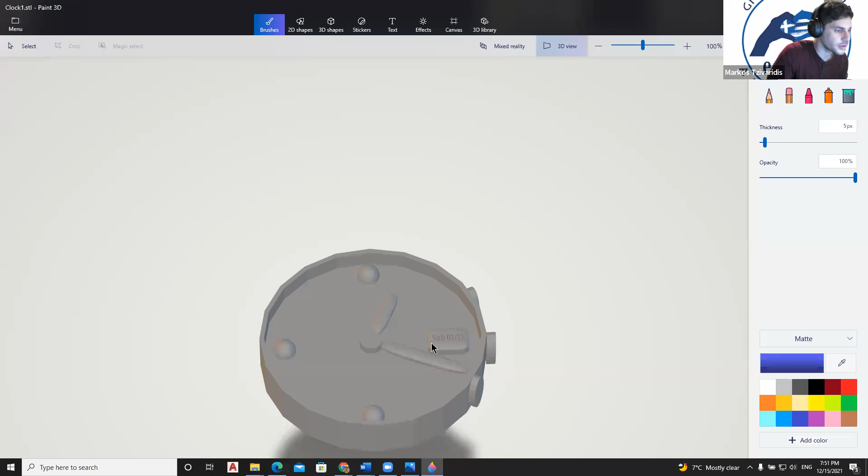The same way that the person who designed the clock did. So if I go back to the clocks, real fast because I have no time, this is the way this thing happened here. This is the same way you can write down things. You can make them holes, write the text, make a hole, and do something like that. This is the same logic here.

So basically, just by creating that, we're done, guys, right now, because the only thing you need to do is place appropriately some boxes here, like that, like that, like that. Maybe fix them a little bit.

I want to be fast because we have no time. Okay, I'm really sorry if it doesn't look perfectly aligned. In any case, this is what you do, and again, group them all together. And there it is, guys.

You just did 3 things. You placed a box, you made it a base, then you placed text and made it a hole, and then you placed boxes and made them holes. And there you have it. There you have another print that you can use for children to teach them how to write their name.